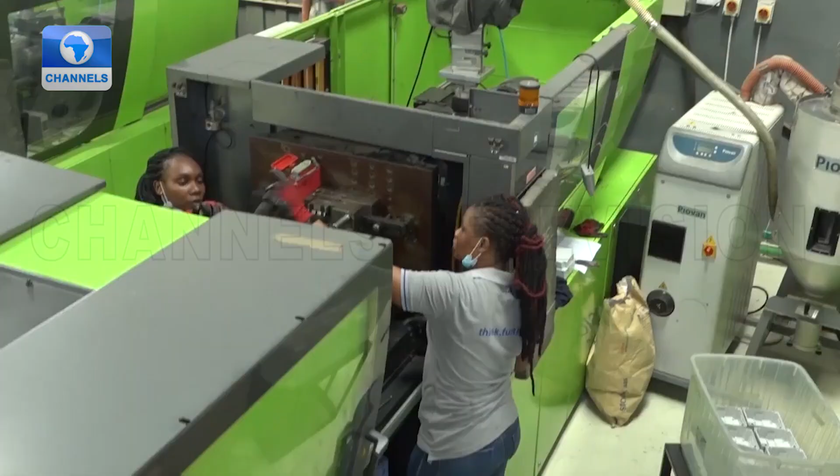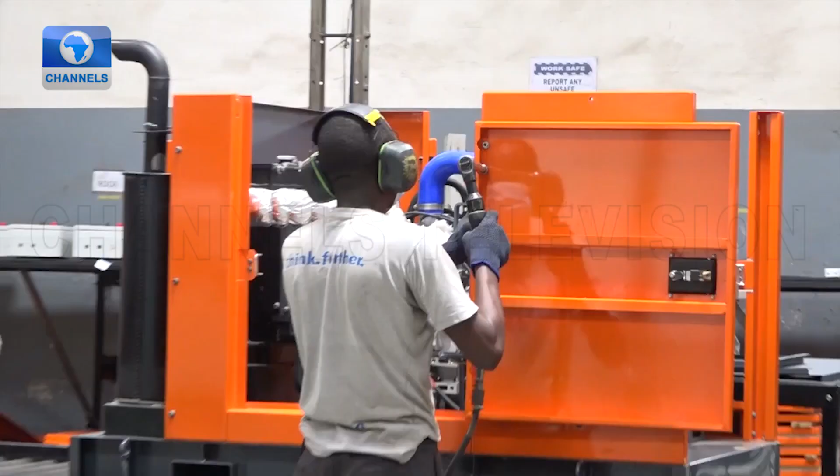Tranos is an engineering and manufacturing leader, adding value to lives through innovative solutions. Customer satisfaction is a key factor of the company's quality management system. From the deployment of high-precision CNC machines and the engagement of competent personnel to the institution of standard error-proof processes, Tranos guarantees the quality of its products and services with a quality management system certified to meet the requirements of the ISO 9001-2015 standard. The officer of Tranos takes our team down memory lane as he explains how the company started.

Tranos, we started about 14 years ago, and the whole idea from the beginning was to try and set up an organization where people can come together and be able to provide value for customers. So the overriding idea was to be able to provide value to customers. Looking at staff strength, I think we probably started with 3 people, including myself. We had a small office then in VI. We started by trying to do things in terms of project management and some procurement that we were doing for oil and gas back then.

Now, we wanted to provide value. So what has driven us across time to date has been trying to find out where can we provide value? What value can we provide for customers? So by asking and answering that question, we've come up with ways, we've learned a lot of things, driven by knowledge, to invest in people, invest in equipment, invest in processes that can help us provide value. So that basically covers what has brought us to where we are today.

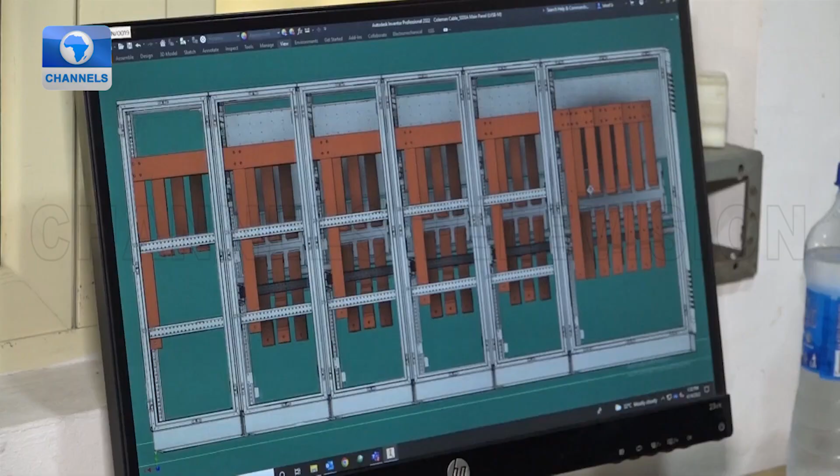In terms of staff strength, I think as of today we're about 170 people, because at times we go up to 200, a little over 200, when we have installation jobs or repair to do for customers on site. So we are an engineering and manufacturing company, and what that means is that we design things and we manufacture those things for customers. Those things will revolve around enclosures for various applications, both mechanical and electrical, power distribution equipment, that's electrical panels, electrical control panels, protection panels of various types.

We make gaskets mainly for oil and gas and petrochemical applications. We make cable trays and ladders. We make warehouse racks for storage. Now, all our products are based on knowledge, meaning that you study what the customer needs, you study where the pain point is for the customer, and then you design a product to solve that problem.

The drive was to solve problems. And when you're trying to solve problems in a sustainable manner, meaning that you want to be able to do this for years to come, you need to build a system. That system will involve people, it will involve processes, and it will involve a lot of knowledge. So the drive was basically to provide value, and that drives everything we do.

We want to provide value. That's the first thing that comes into our minds when we're trying to deal with things, when we are speaking to customers or when we're trying to respond to customers. Because someone walks in and says, oh, can you do this for me?

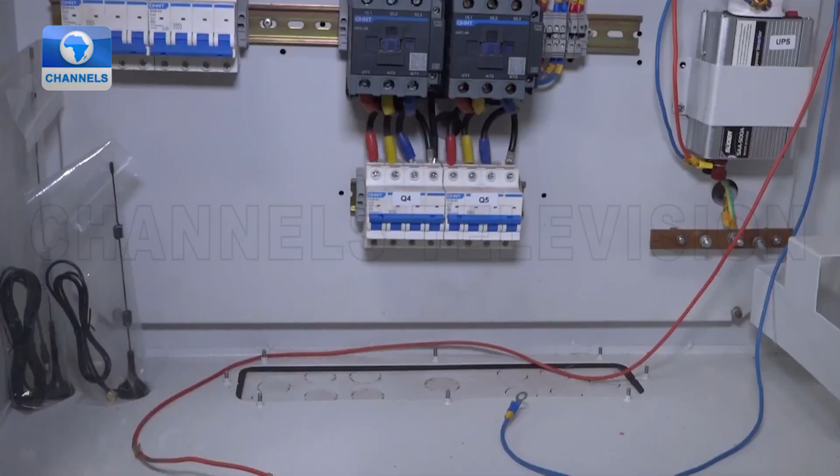So our products are first and foremost geared towards delivering power to customers. We make various types of electrical panels and switchgear, which helps take power to where it's needed. We also manufacture cable trays and ladders, used for power distribution and routing cables. In addition, we have a range of gas generators, which we now manufacture first for the telecoms market, designed for remote applications.

So we have specifically designed gas generators that can work remotely with minimal intervention, and they run on LPG. LPG is your cooking gas, so you're basically using the same gas you use to cook to power your equipment. And if you look at all that, that's why I said when you asked, I talked about power.

Now, our enclosures are also used a lot for power, so we have customers that use our enclosures for generators, for protection and sound attenuation. We have customers that use our enclosures for other power distribution, so you have a customer that wants to build his own panel and comes to us to buy his own enclosures. We make enclosures for meter boxes as well, since the meter in your house has to be protected in a particular well-designed enclosure. We make that too. So you'll see that roughly 80% of our products are geared towards power.

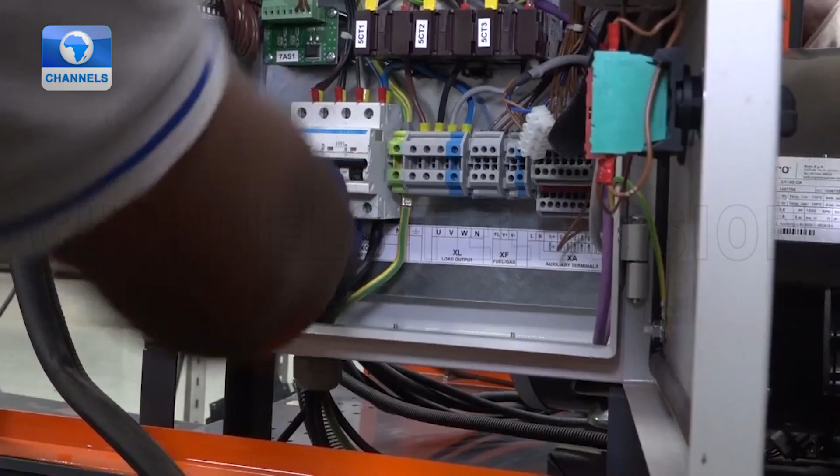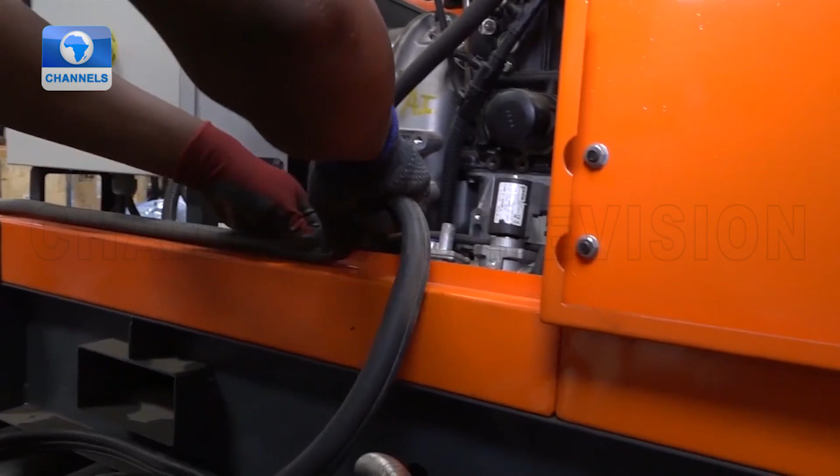The Nigerian power challenge is not a technology or a technical problem. It's a commercial problem. It's similar to years ago when we had NITEL, and there were issues with communicating. What changed wasn't a new technology really, per se. Yes, GSM was relatively new then, but that wasn't what changed.

What changed was that the industry was commercialized such that it was able to attract enough investment to solve the problem. Similarly, in the power sector, there are no commercial incentives for a lot of investment to come in and change what we have. If it was a technology issue, we could say, okay, we can come in - and yes, we are doing that in a way with the gas generators we have, which easily replace diesel generators and give a better return on investment at the end of the day. However, it will not suffice for the whole range of demands available for power consumers. So bottom line, the Nigerian power problem is a commercial problem, not a technical one.

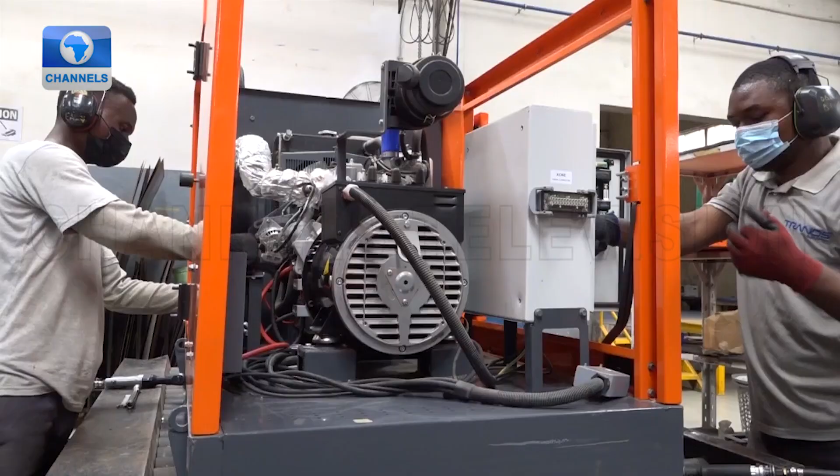From an initial staff strength of 14, Tranos now boasts of well over 100 workers, as the managing director speaks on the services provided by the company.

We don't work with short-term benefits in mind. In a lot of the things we do, we could have easily just gotten a partner or a manufacturer somewhere to say, okay, we make warehouse racks. We get a warehouse rack partner somewhere in Europe or Asia, and all we do is receive orders and import. That's an easy way of doing things, and you make some margin on it. It's business. But we decided that rather than do that, let's learn how to produce these things ourselves and even improve on what others are doing outside.

Looking at it from that perspective, I think that's what differentiates us from a lot of people. Depending on the market or the product category you're looking at, we compete differently. But one key thing we hold is to say I don't just want to supply you this thing or solve your problem, I want to understand how you will use it. I want to understand how I can improve the product so you can have a better time using it. That, I think, clearly stands us out from everybody else, because we have that clear dedication.

It's not attractive because it doesn't make money for you immediately. It's a long-term thing, because we believe that at the end of the day, that process will get us to be able to provide better value for customers and also help us grow as an organization.

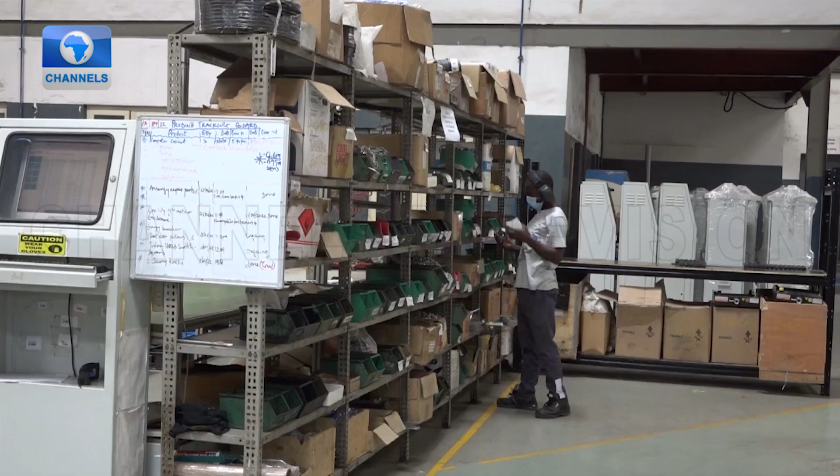Challenges in business, especially in an environment like Nigeria, are continuous. So I'm not going to say I've solved some of the problems, but I'll think of some of the lingering challenges we have. For me, the biggest challenge would be supply chain.

For a manufacturer, you are basically getting input materials, raw materials, and you're either converting them into some other stuff, or incorporating them into an assembly. Now, if you're a manufacturer, one small pin missing from the full bill of materials of what you are producing means you can't finish that production. In a country like Nigeria, where there's limited availability of support industries, industries that can manufacture some of your own inputs, especially in our case, it means we have to bring a lot of things in. The challenge is that importation and clearing of goods is a lot of pain.

So that's one of the major challenges we face, because we try to do what we call a lean manufacturing process. And in lean manufacturing, there's another concept called just in time. So you go to a factory, say in a place like Japan, like one of our partners, Yanmar. They don't keep inventory for more than 4 days, meaning what I need to produce on Thursday arrives in my factory on Monday. It doesn't stay in storage for more than 4 days.

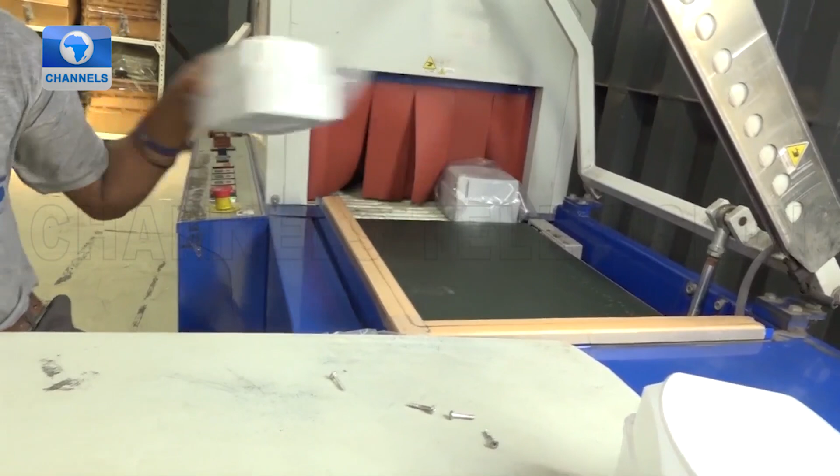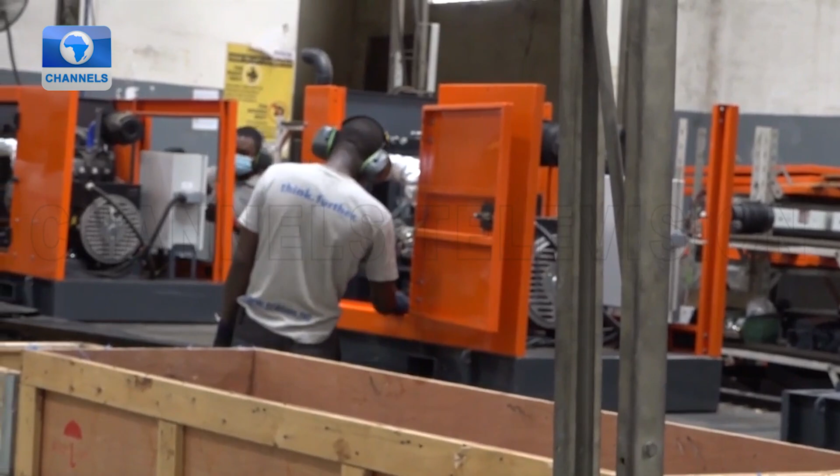The production manager explains the various stages of the process. This is a fabrication company, and this is where everything comes together. In here we have the mechanical assembly area and the generator assembly area. Over here they're assembling a TG1000 generator. They have 4 stages over there: stage 1, stage 2, stage 3, stage 4, where they mount all the components. At the end of the day, we put in the oil and then the testing is done, which completes the process.

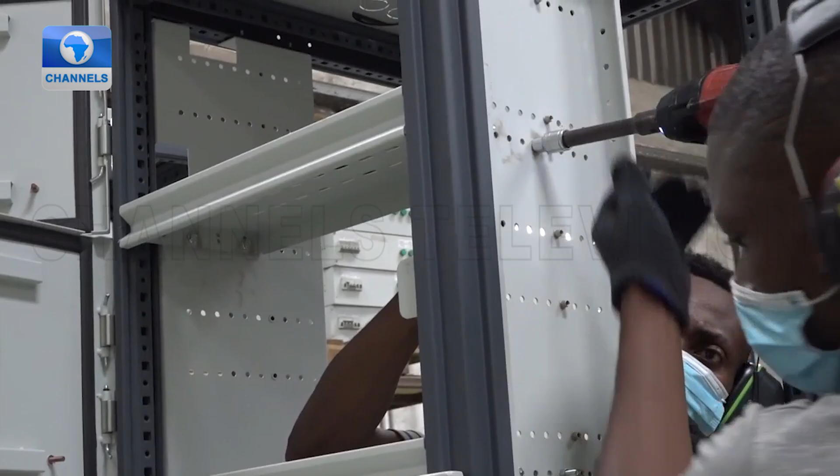On the other side is panel assembly. They are fixing the frames and all the side walls to complete the panel. It's actually an electrical panel, but for this purpose, the client doesn't have the components here, so this is going to be installed on site. For what we're doing here, we're just putting the mechanical components together.

Over here to the front is finished products. We have all our finished products: feeder pillar, wall-mounted enclosures, some freestanding enclosures, and some panels that have electrical components in them. Over here we have our cable processing area. This is where we process our bus bars and our cables, and these components go into panels that we have to do electrical assembly for in here. So we have the capability to do electrical assembly in here, or we can also mount these components in the client's facility, depending on what the client wants.

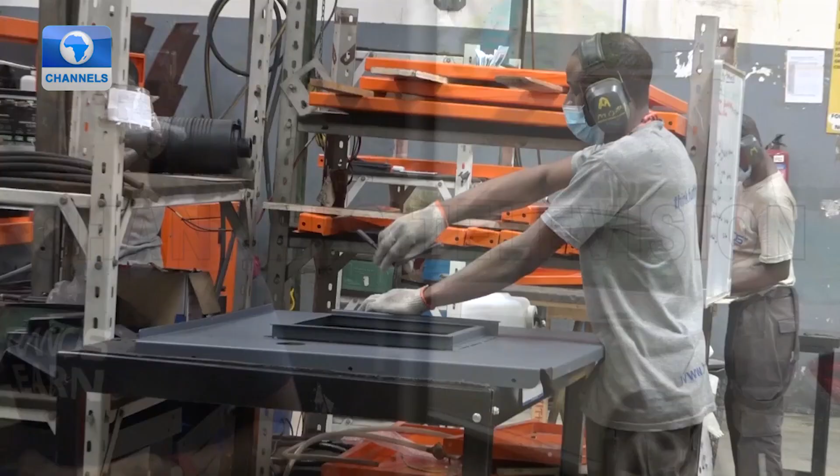The production manager takes our team to another factory where finished products are displayed. We're putting electrical components as well. So it has the enclosure itself, and it also has a stand for positioning the feeder pillar. We also have lashes here for lifting the feeder pillar. Now this is a finished product, it's wrapped, it's already approved by quality, and this is ready for shipment.

Over here we have our electrical panel. So this is a 40 amp panel and it's ready.

Two senior staff of Tranos manufacturers explain their roles in the production process.

We work with different departments: the sales team, production, quality, and supply chain. When we receive a request from the sales team in form of a request for quotation, we prepare a bill of material in response to that request, using our ERP system, the GSS ERP system, whereby we prepare this bill of material and send it to the sales team.

Aside from the bill of material, we equally provide manufacturing drawings for the production team. When we receive a request from the sales team, we convert that request into a 3D CAD model, something like this.

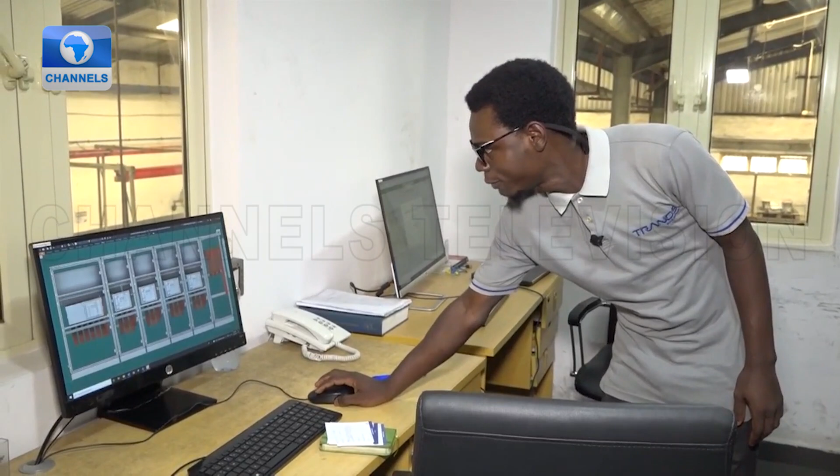We have different product lines. This is one of our product lines, a low voltage switchgear that was modeled based on the client's request.

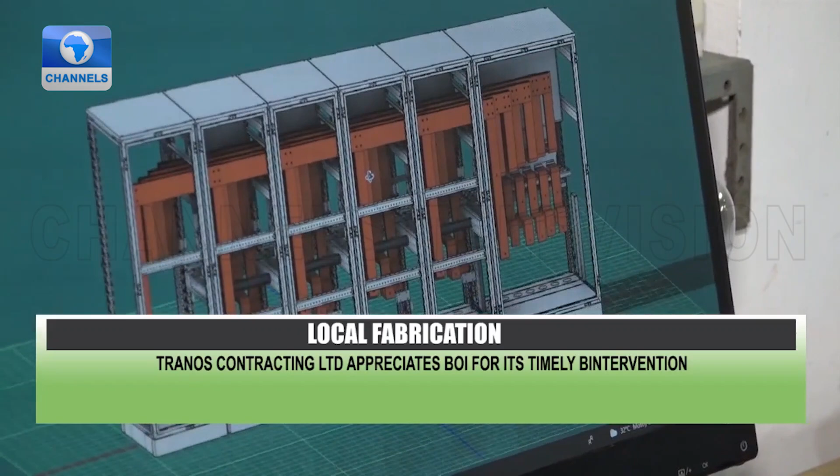We have an in-house electrical team that gives us a schematic and a component arrangement diagram, which we convert into a 3D model. From the 3D model, we provide different drawings for the production team to produce.

Aside from the switchgear, we equally have other models. We have a couple of softwares: Autodesk Inventor, Autodesk Design Suite, SolidWorks, and Solid Edge from Siemens. So we have other product lines.

This is a transformer enclosure done for one of our clients recently. The client brought their transformer in-house and we took the necessary dimensions.

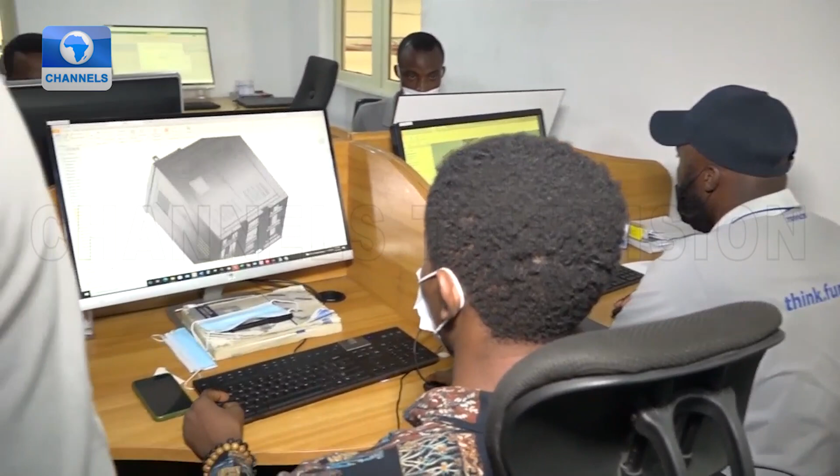We took the necessary dimensions of the transformer, and we did an analysis to check the structural integrity of the base to ensure that it can sustain the weight of the transformer.

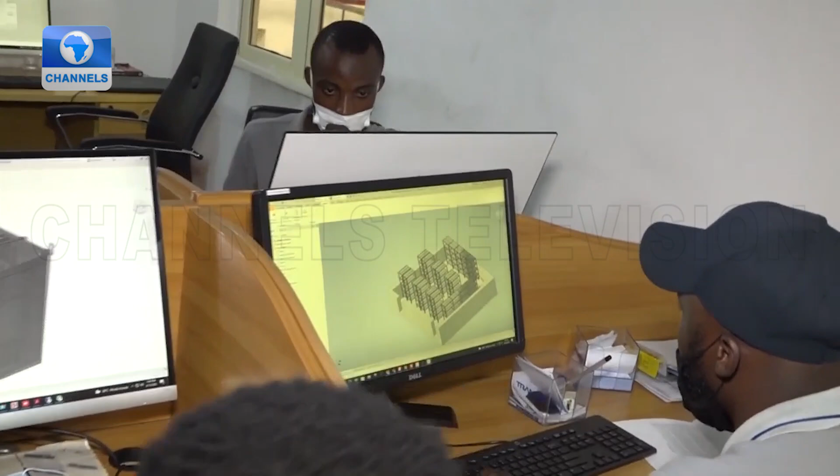This is one of our product lines, the warehouse rack that was done for a client recently. We got the layout of the client's workshop, and we optimized the layout to provide the suitable rack for their system.

So what we do majorly is work with client requests and provide engineering solutions for the manufacturing team to bring the product back to life.

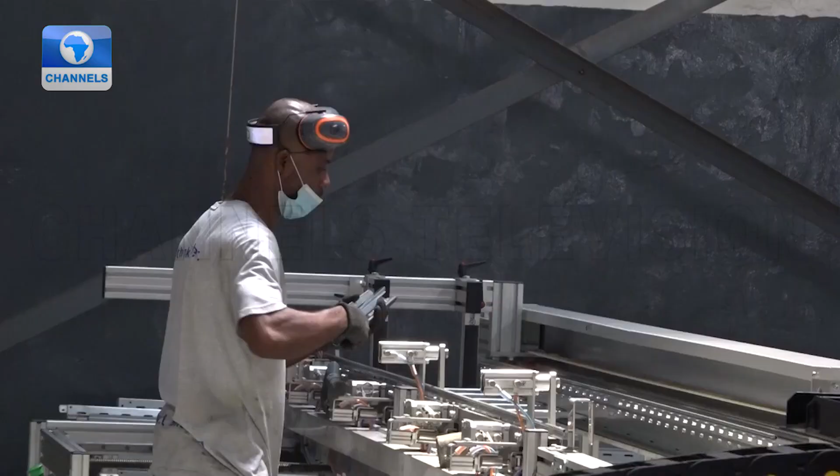The managing director speaks on their challenges, just as he appreciates the Bank of Industry for its intervention. In terms of financing, BOI is open, and we've worked with them now for about 4 years or thereabout, maybe a little more than that.

Because of the professionalism that I have seen there - a lot of people still assume that it's not possible to get introduced to BOI and be able to walk through the process to get your facility. But it does happen. So my advice to young entrepreneurs will be, don't believe what you hear.

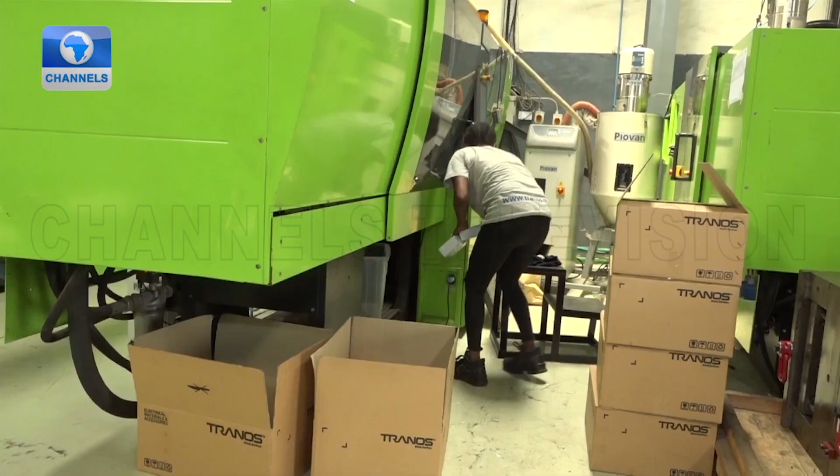Try and go in and try for yourself, because if you have a genuine business case, I believe that BOI can support you. I think it's a partnership, and they also understand that.

So we are looking at the present, midterm, and future, and I think that this partnership we have with BOI will continue for a long time to come. We expect to still work with BOI, so let's continue to build this partnership for the long term.

Tranos is built on the dream of establishing an organization where individuals are given the opportunity to leverage their talents and abilities, joining these abilities with those of colleagues, teammates, and state-of-the-art technology to provide world-class products and services.

They are an organization focused on bringing the best out of their workforce, individuals and businesses through logical and creative thinking, using state-of-the-art technology to provide world-class products and services. That is why the company prides itself as one that thinks further.